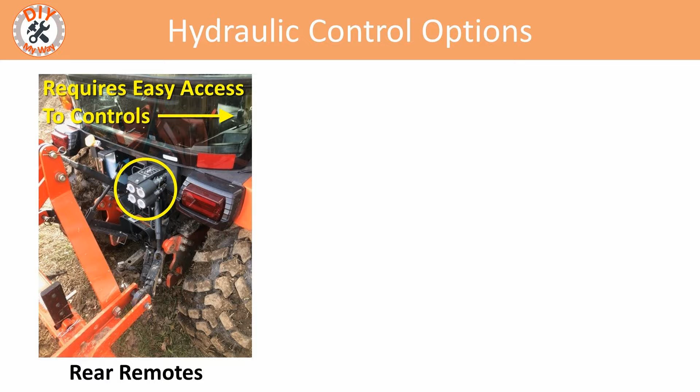There are a number of ways to tap into your tractor hydraulics to power a backhoe thumb. If you have hydraulic remotes on the back of your tractor, you can make use of them to operate the thumb, provided you can reach the remote valve control from the backhoe seat. That could be a problem if you have a cab on your tractor like this one. Also, this requires 2 more hose connections to your backhoe. To keep things as simple as possible, I decided to tap into the Power Beyond loop that's used to power the backhoe, so no extra hydraulic connections are needed, and I'll use a third function kit for the thumb control.

The Summit Universal Third Function Kit is designed to work with the Power Beyond loop and is typically fed from the front-end loader valve Power Beyond port to the pump or P port to operate an implement such as a grapple from the A and B ports. The loop continues from the tank or T port to power the 3-point, remote valve, or a backhoe before ending back in the hydraulic tank.

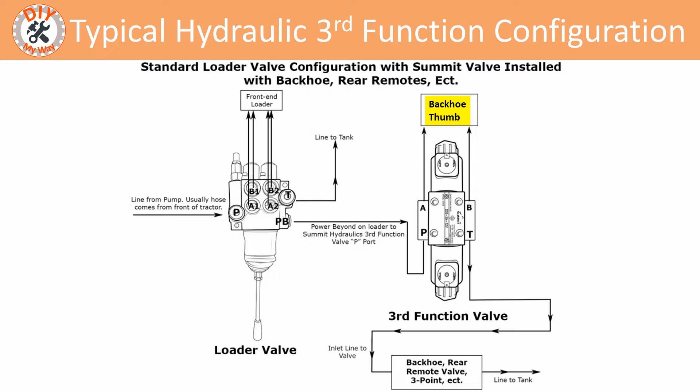But that grapple connected to the A and B ports could just as easily be a backhoe thumb, and that's my plan except for one change. I'll put the third function valve after the backhoe and before the 3-point lift and tank. The beauty of the Power Beyond loop is that the order of the valves in the loop typically doesn't matter. You'll see why I chose this position in the loop later.

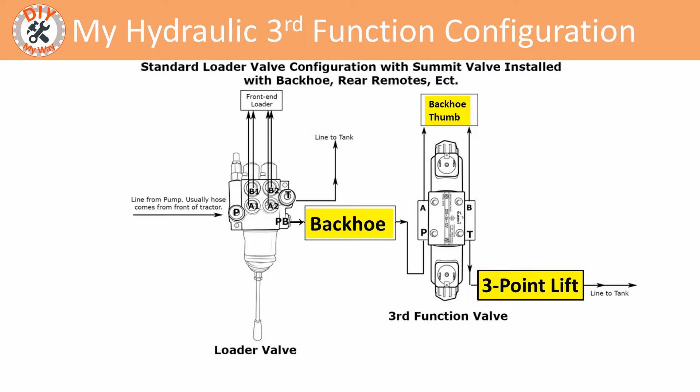For instance, I mentioned using existing rear remotes where the bucket cylinder operates normally with the bucket spool valve and the thumb cylinder is operated using one of the rear remotes. The cylinders work fully independent of each other, but you have to be able to comfortably reach the remote spool valve from the seat of the backhoe. This is the simplest and probably the least expensive option.

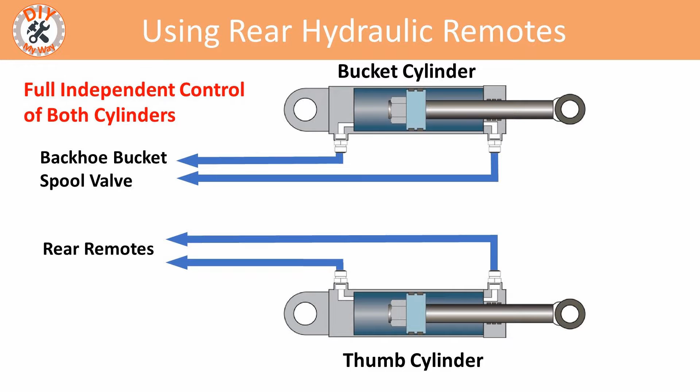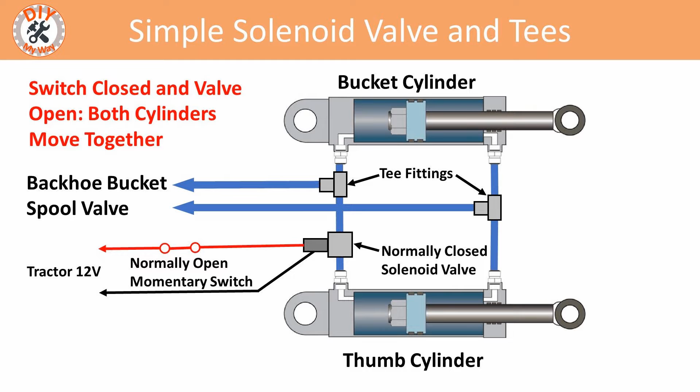Another approach I've seen online is to insert T-fittings in the bucket cylinder lines and use a normally closed solenoid valve controlled by a normally open switch, or it could be a toggle switch. With the switch open, the valve is closed and no hydraulic fluid can flow through the thumb in either direction, so it is locked in whatever position it happens to be in, and only the bucket cylinder moves when you move the bucket spool valve. When the switch is closed, the valve opens, allowing hydraulic fluid to flow into both cylinders, so they operate at the same time, opening or closing together when you move the bucket spool valve. This option is also fairly simple and inexpensive, but you lack independent control of the thumb and bucket.

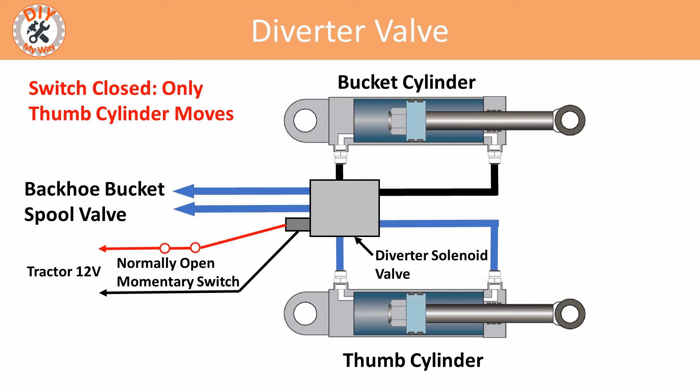Finally, you can use a diverter solenoid valve to switch the flow of hydraulic fluid from the bucket cylinder to the thumb cylinder. So when the switch is open, the bucket cylinder works normally, and the thumb cylinder is locked in position. Close the switch and the bucket cylinder is locked in place while you control the thumb cylinder with the bucket control spool valve. You can control one cylinder or the other, but not both cylinders at the same time. But since I wanted fully independent and simultaneous operation of the cylinders, I went with a third function valve design. But enough about all that technical stuff. Let's plumb up some hydraulics.

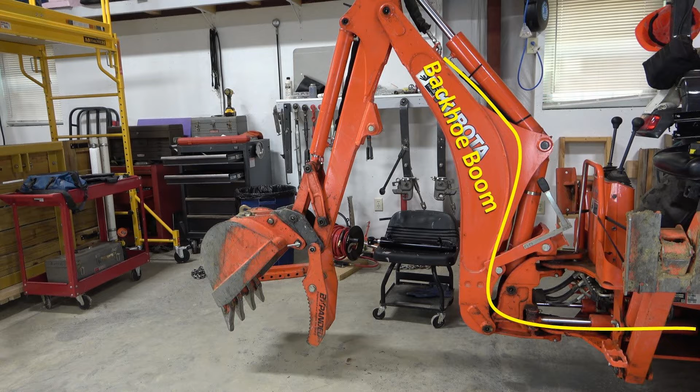First, I determined the length of the boom hoses by measuring the distance from where I'll mount some bulkhead fittings, just like these that connect to the bucket cylinder, to underneath the backhoe seat where the third function valve will be located. I plan to follow the Kubota design and run shorter hoses from the bulkhead fitting to the thumb cylinder ports. The reason for this is that those last few feet of hose are much more likely to get damaged by digging than the longer hoses running inside the hollow backhoe boom, and I'd rather have to replace a short section of hose than to rerun the entire hose if one gets damaged.

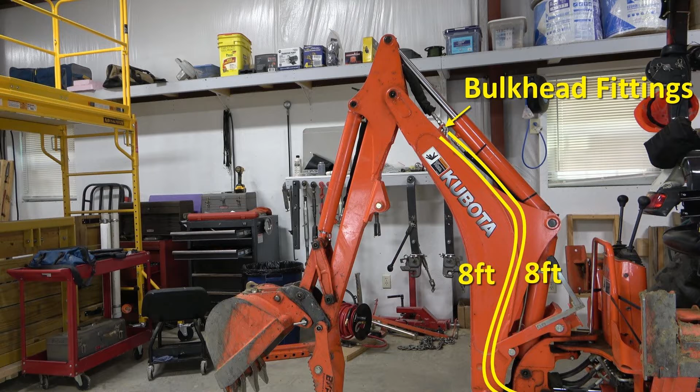Turns out 8 feet will be good and leave wiggle and flex room, so I'll need 2 8-foot hoses. To reach the extend port on the cylinder from the bulkhead fittings will take a 3-foot hose, and to reach the retract port will take a 4-foot hose. I ordered the hoses from Summit Hydraulics along with the kit.

When choosing your hydraulic hoses, a word of advice, pay attention to the diameter of the hose, not just the hose fitting size, because when I ordered the hoses from Summit, I ordered the 3/8 inch connectors that I needed, but what I didn't pay attention to was the actual outside diameter of the hoses. The factory backhoe hoses are probably a 1/2 inch in outside max, and these are about 3/4 of an inch. Now that did make a difference in a few tight places. It all fit, but it was a little snugger than I would like.

We interrupt this program to bring you this special subliminal message. We now return you to your regularly scheduled program.

First thing I'm going to do is run the longest segments of my hydraulic hoses down through the boom and to the undercarriage of the backhoe. And to make it a little easier to do, I'm going to extend the boom out on the backhoe. Before feeding the hoses through the boom, I want to put a protective sleeve around them, similar to what's already on the tractor. I found this 25-foot roll of 1-inch ID nylon protective sleeve on Amazon.

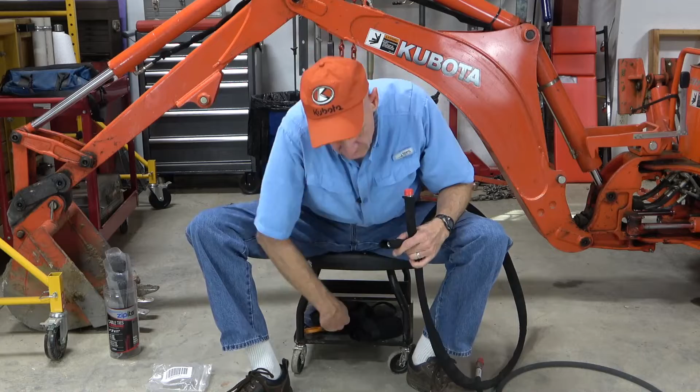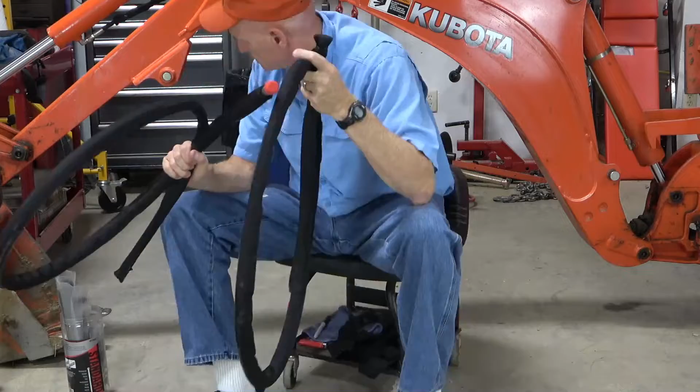Once I had it pulled over the length of the hose, I cut it cleanly with a pair of scissors, then used a lighter to melt the end to prevent it from fraying. I do the same for the other hose. For both hoses, I pull the sleeve past the hose connector, fold it back, and zip tie it, and you'll see why in a moment. Here's a closer look at the hose end. I'm about to push this hose through a bunch of dirt and grease, and I want to keep that hose connection as clean as possible during the installation.

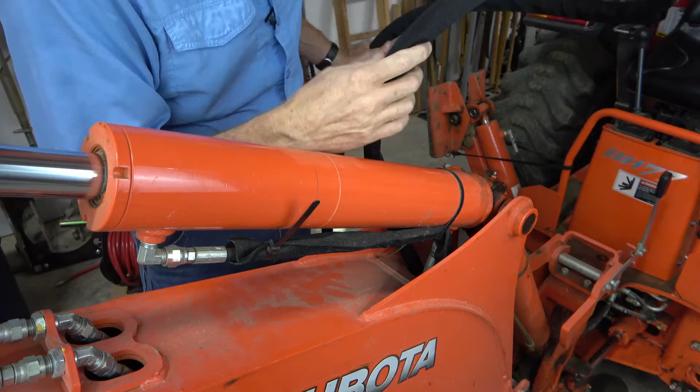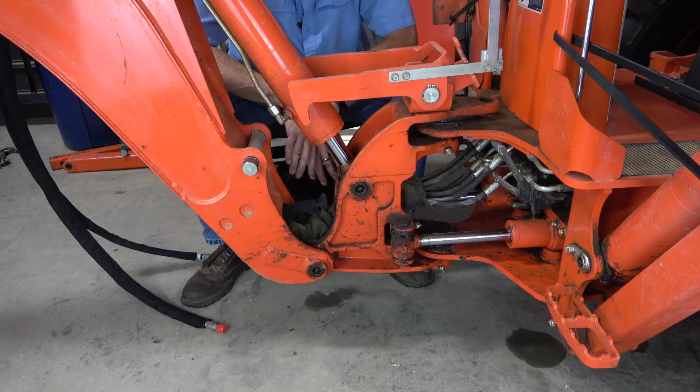I feed the hoses into the opening under the dipper stick cylinder and look for the ends to appear at the bottom opening of the boom. Once I see them, I pull a few inches of slack through. I don't yet know which way I'll route them to the area under the seat, so I'll just pull them both to one side for now. I take the backhoe off the tractor and onto the dolly to be ready for the next plumbing steps.

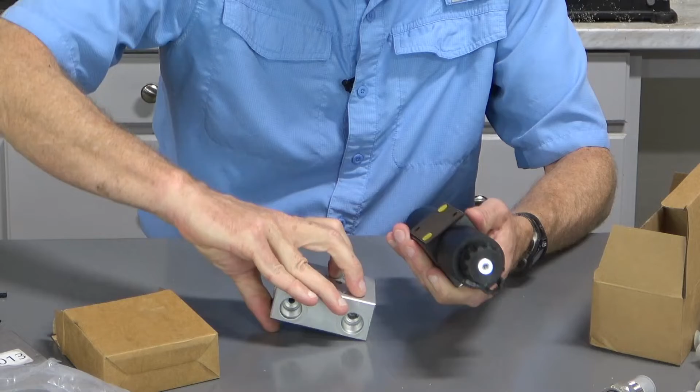The third function valve requires some assembly, and they have no instructions for how to do it. Actually, while the paper instructions included in the kit do not, the downloadable instructions for the kit do cover it, but it's not as detailed as I think it should be, so pay attention to the tips I'm about to give you. But it's not hard to figure out if you look at their diagrams. You have first the solenoid valve itself and the actual connection block here, the two parts. And there's a protective cover on here that comes off, theoretically speaking.

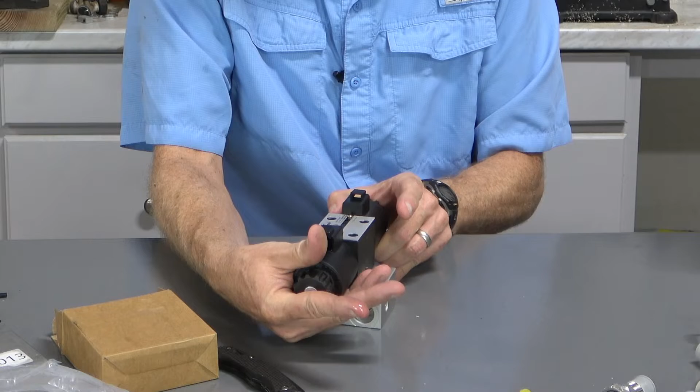Under here you'll see there are 4 O-rings embedded right here. I'm going to give those a little bit of lubrication with hydraulic oil before we marry it up to this piece here. Right. The valve is marked with P on this side and B, T, A on that side, and with the P port and T port here, meaning pump and tank, and the A and B here, you want it oriented this way, where the solenoid sits like this, as you see in the diagram. It comes with 4 bolts to assemble it.

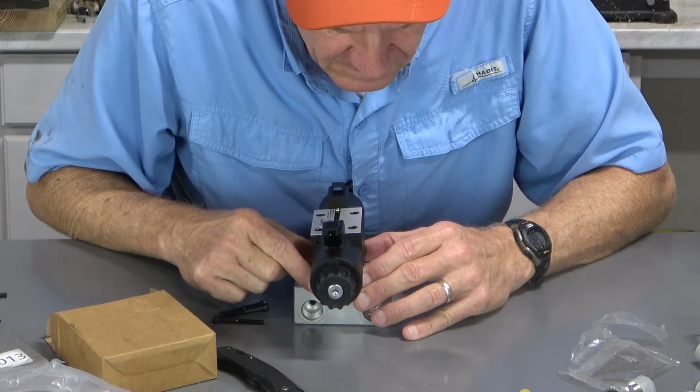Requires a 5/32 Allen wrench to screw it down, and the recommended torque for this screw, which by the way is a number 10 by 24 thread, is 22 inch-pounds. Before I get any of them tight, make sure I get them all started. And I wish I could do 22 inch-pounds, but I have no way to put a wrench on this, so I'm just going to tighten it down real good. But I'm going to go diagonally, tighten each one a little bit, and just go back and forth a few times. I'm now thinking I might have been wise to use a little Loctite blue. Looks pretty good.

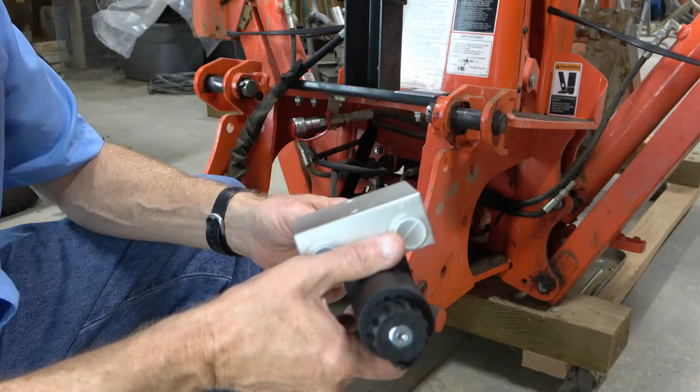Since it's going to take me a while to figure out how to orient everything in here, I put some plastic caps borrowed from other fittings on here to keep any contaminants out of the connection block. The easiest way I can figure to connect this up is to get into the Power Beyond loop here on the tank return coming back from the backhoe, which means that goes into the pump port. It's easy to get confused. It's not tank to tank. If that's going to the tank, then that goes into the pump here, and the tank connection will go here.

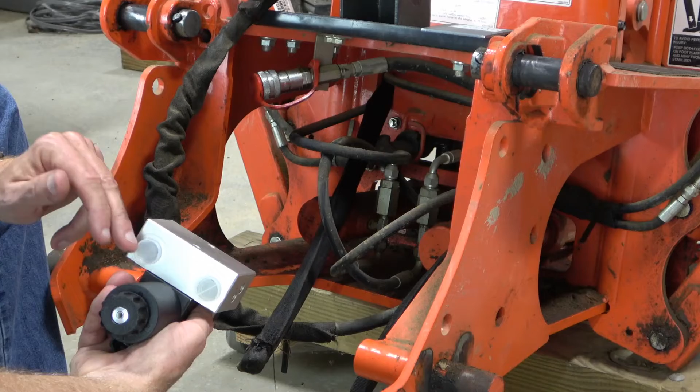So the first thing I want to do is to remove these bolts so that this can be loose, because this connection is going to be coming directly off of one of these ports now, and then this connection will be screwed into the pump port here, and this one to the tank. First, I removed the tank hose from the mounted fitting assembly. Then remove the fitting assembly.

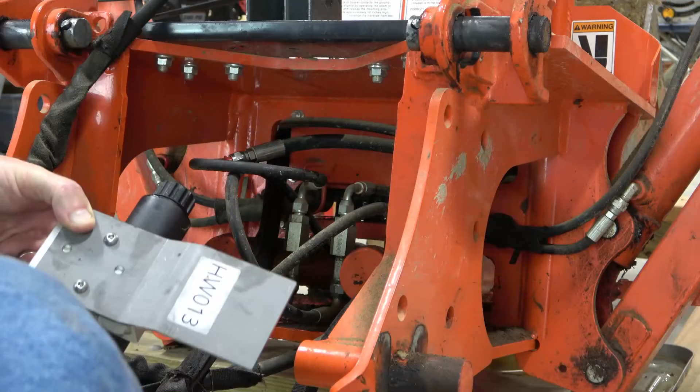I believe I've got the perfect solution here. And it's different than I originally envisioned, but I thought that might happen. And that is to mount it like so. Tap some screws here. I might even weld a little piece of plate across the back there so that I can screw into that as well.

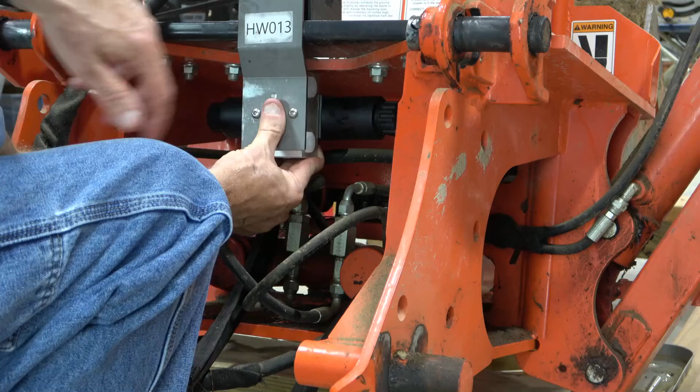And then the third function solenoid valve goes here. My tank connection will come out here, possibly with a 45 or a 90. I'll have to see which works best. And then the tank return from the backhoe will go in here, and A and B on this side. I think that's going to be awesome.

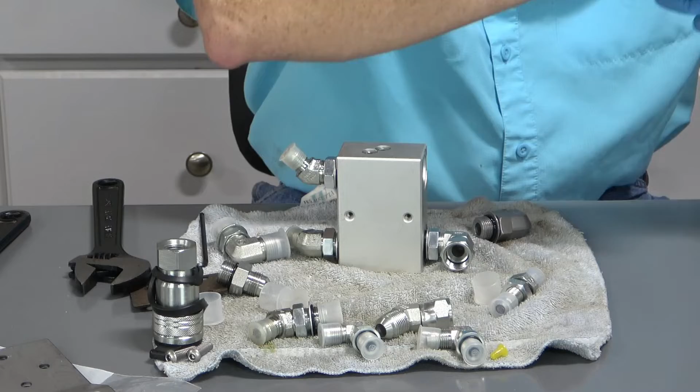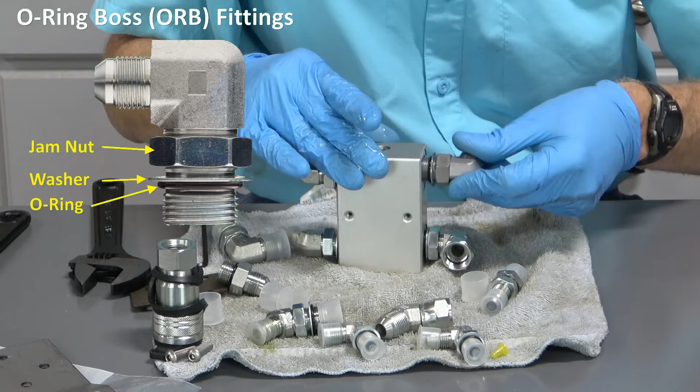It turns out I had to take the solenoid valve off the connection block to be able to screw on the fittings. I add some hydraulic oil to the O-ring, then wipe excess off the threads. The connection block accepts O-ring Boss fittings, which are now my favorite kind. These fittings have a jam nut, washer, and O-ring, and are very easy to install. Screw it on until fully seated, then back it off to the orientation I want. Then all I have to do is tighten the jam nut until the washer is flush with the block.

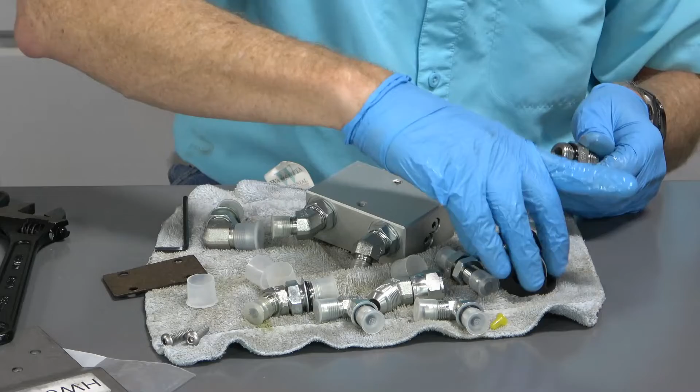The quick connect coupler is threaded for a 1/2 inch ORB fitting, so I use a straight 1/2 inch male ORB to 1/2 inch male JIC connector, which were included with the kit. Because this is a straight fitting, there's no need for a jam nut or washer. It just has the O-ring. I tighten it until the fitting nut is flush with the coupler and the O-ring disappears.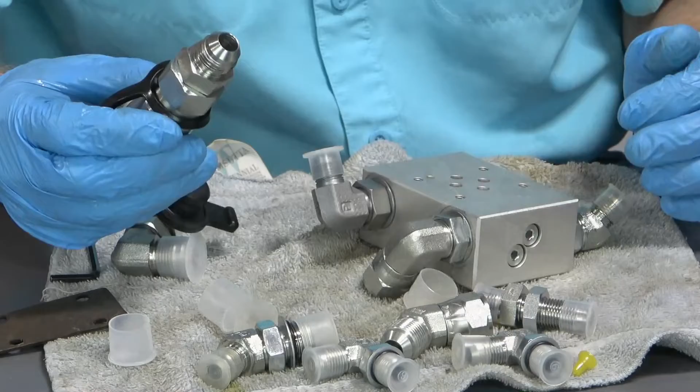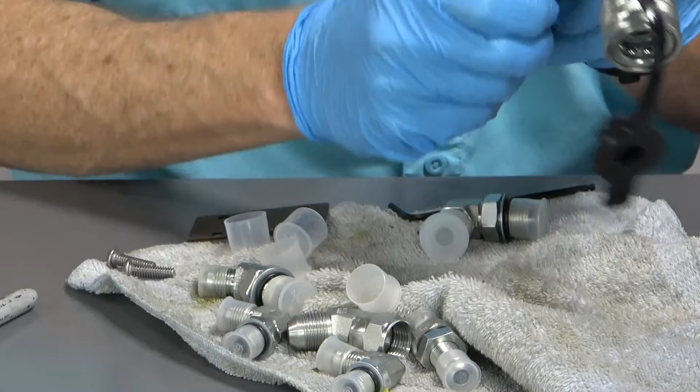Now I make my first JIC connection, threading it on hand tight. Then I make a mark on the 2 nut flats. Half-inch JIC connectors require tightening to 1 1/4 to 1 3/4 nut flats, so I'll go for 1 1/2. But ended up at about 1 1/4, so that will do. Then I reattach the solenoid valve to the block, this time using some Loctite glue.

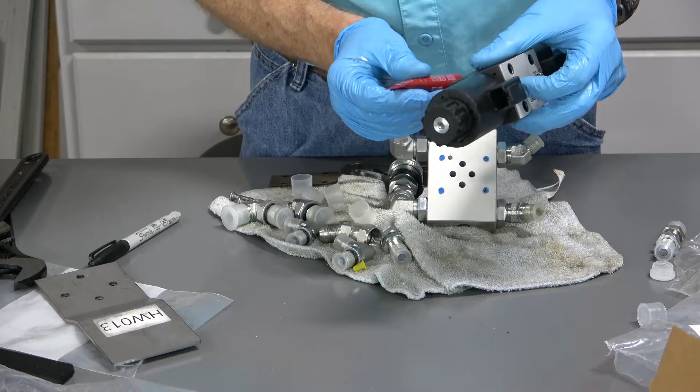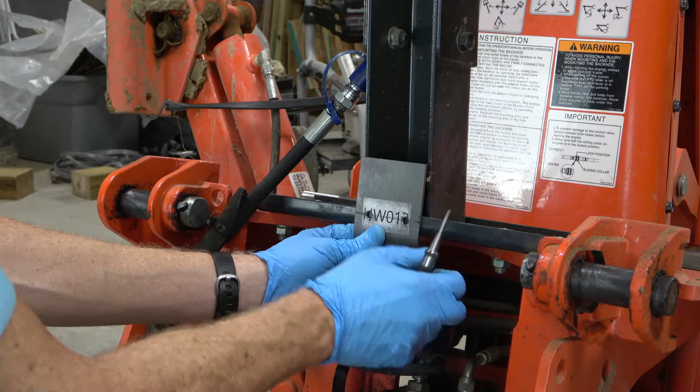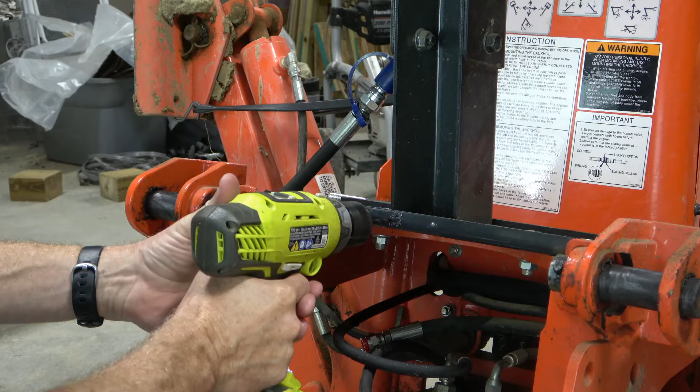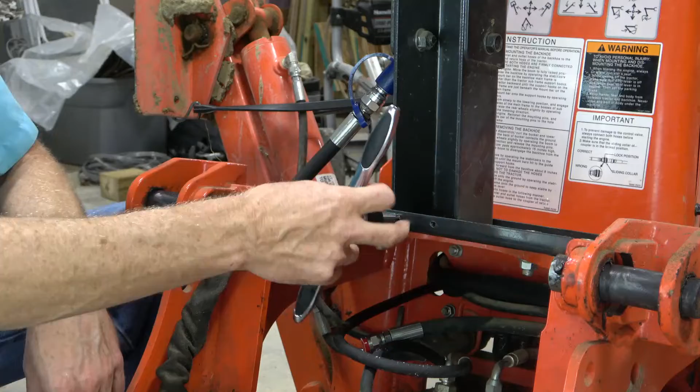After drilling a couple of 5/16 inch holes in the mounting plate, I use my automatic center punch to make divots where I'll drill into the bottom of the backhoe seat frame, which is about 3/16 inches thick. Then drill 2 13/64 holes. I put a dab of cutting oil on the bit first, by the way. And tap them for 1/4 by 20 thread screws. I test fit the screws before attaching to the mounting plate.

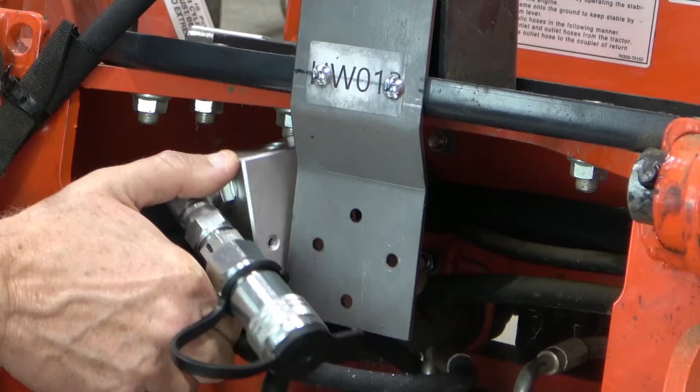At last, I can attach the third function valve. It's time to plumb this thing up. First, I connect the backhoe tank return line to the pump or P-port on the connection block. It's in a pretty tight space, but manageable. This connection and the remaining ones are 3/8 inch JIC connections, and the same tightening rule applies as the 1/2 inch JIC connections.

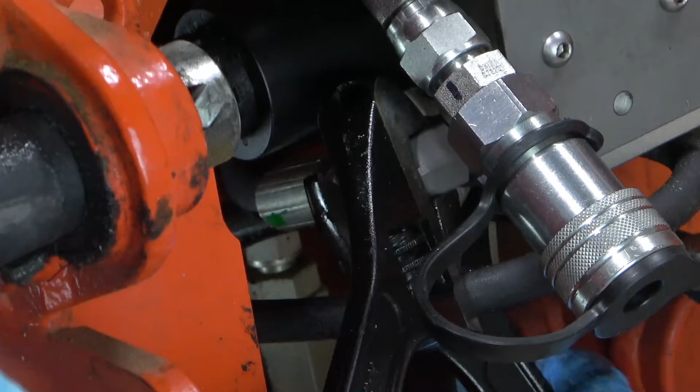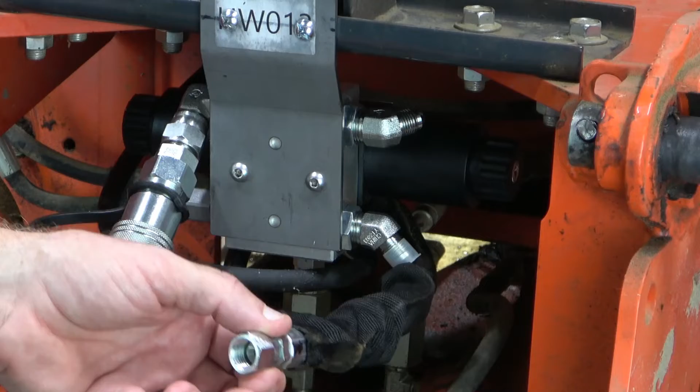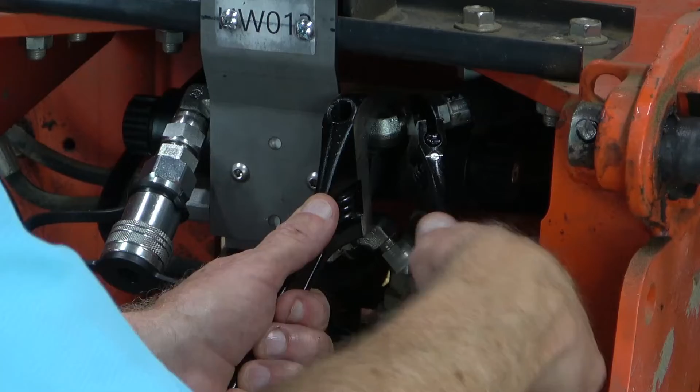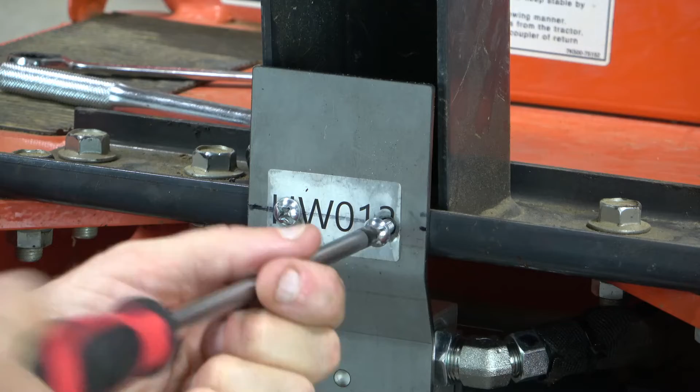Now I cut back the protective sleeve I had over one of the 8-foot hoses. It doesn't matter which hose goes to which of the A and B ports from an operational standpoint, and you'll see why later. I just picked based on which hose most easily reaches the fitting. I tighten to spec. Then secure the protective sleeve to the hose with a zip tie. Same song, second verse for the other hose. I decided to add some split washers to the mounting screws to ensure they don't come loose.

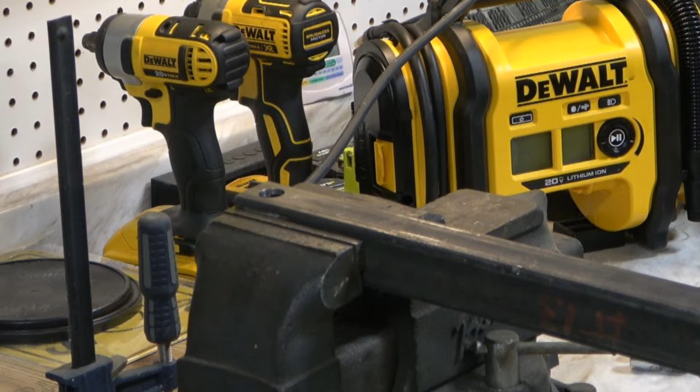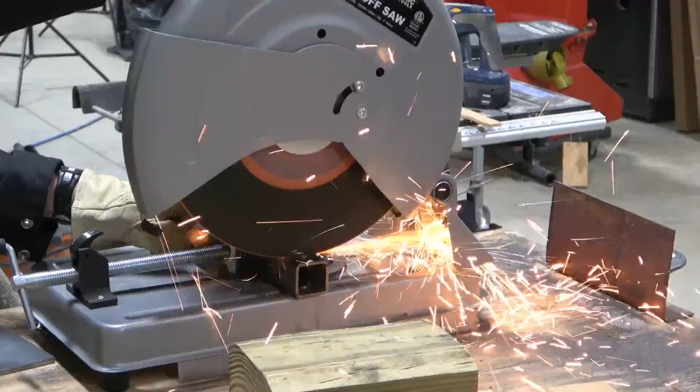To mount the bulkhead fittings, I need a couple of short pieces of angle iron, but didn't have the right size I wanted, so I decided to make the angle iron out of some square tubing I had on hand. I've already drilled a 9/16 inch hole all the way through the tubing. Now I just needed to turn it into angle iron. I established a straight cut with the top of the vise as a guide. Then finished the cut with the tubing in an upright position. And the same thing for the opposite side. Then I used my chop saw to turn the tubing into 2 pieces of angle iron. There's one. And there's 2. I round off the edges as a finishing touch.

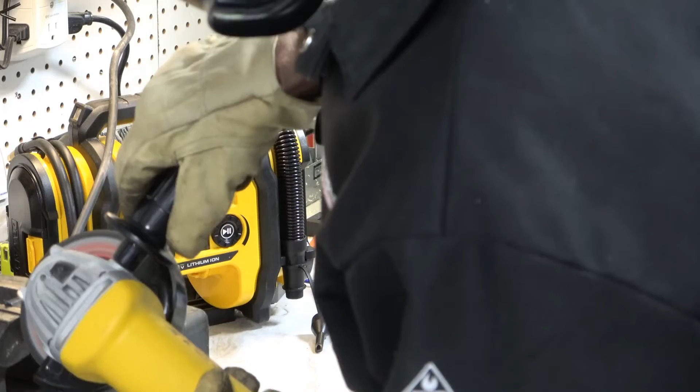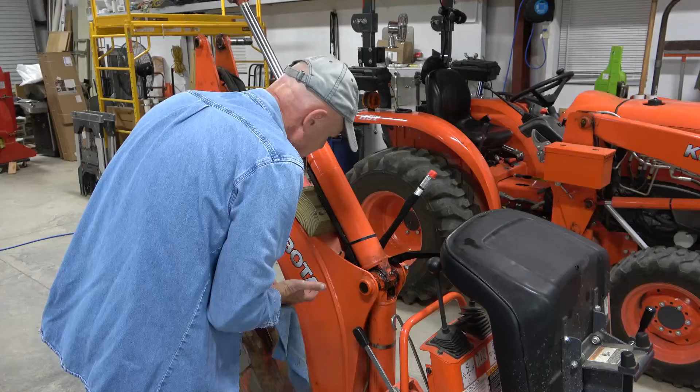Next, I moved the dipper stick cylinder out of the way. The one important thing I forgot to do, which I should have done, is wrap the exposed cylinder rod with tape or cloth to protect it from welding spatter. I removed the paint from the area where the bulkhead mounts will be welded. Now the fun part.

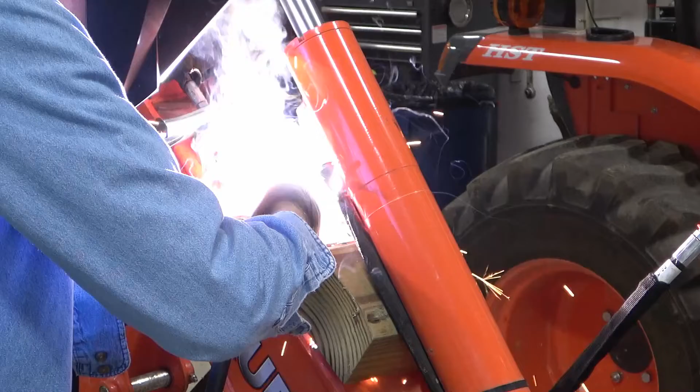I brushed the slag off the welds. Clean them with paint thinner. Then paint it with a couple of coats of Kubota orange after the primer has dried.

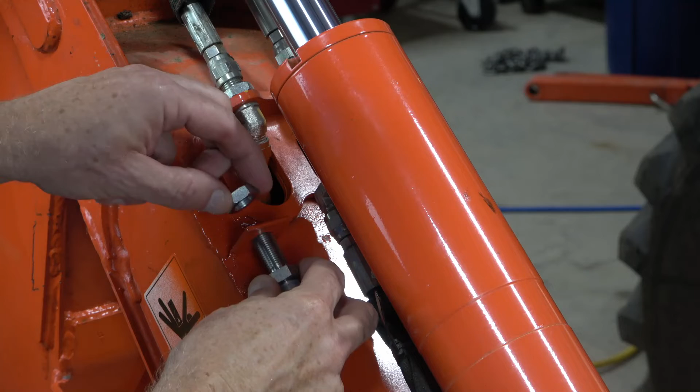After the paint is dried, I install one of the 3/8 inch JIC bulkhead fittings. Then connect one of the boom hoses. And tighten to spec. I repeat for the other side.

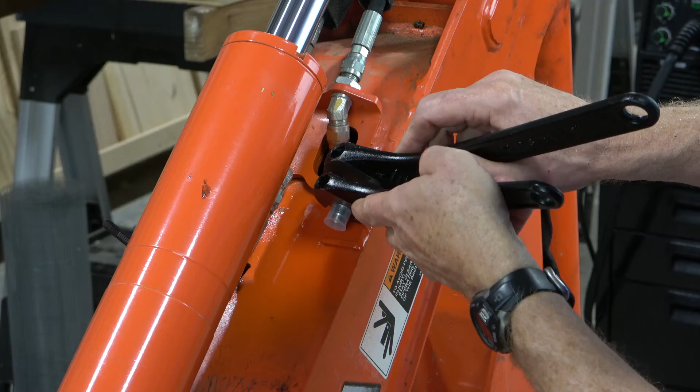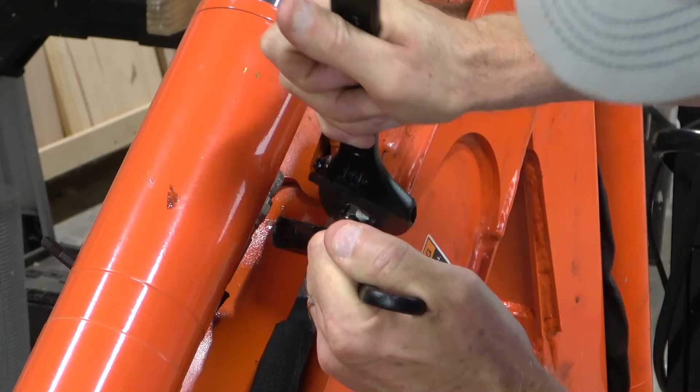Well, this video is getting a little long, so it looks like it'd be best if I do a part 3 to finish things up. And in part 3, I'll weld up the spacers and gussets to the backhoe thumb, mount the cylinder, connect the short hoses, do an initial operation test, wire up all electrical connections, and then do field testing of the thumb. So stay tuned.